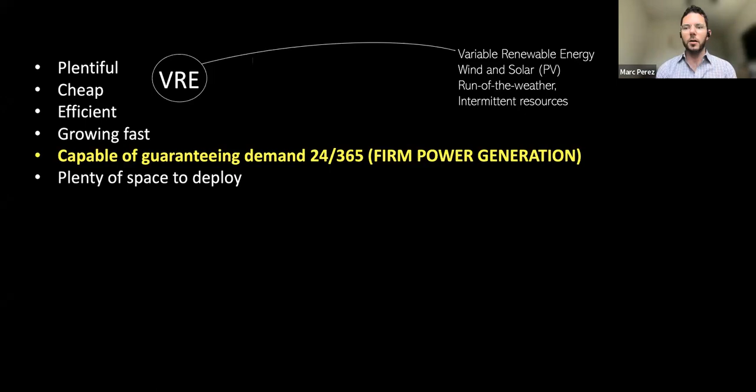We'll have to blanket our land with solar PV and the like, and I'll be describing some of the economics also along the way. So first, the plentiful nature of the renewables.

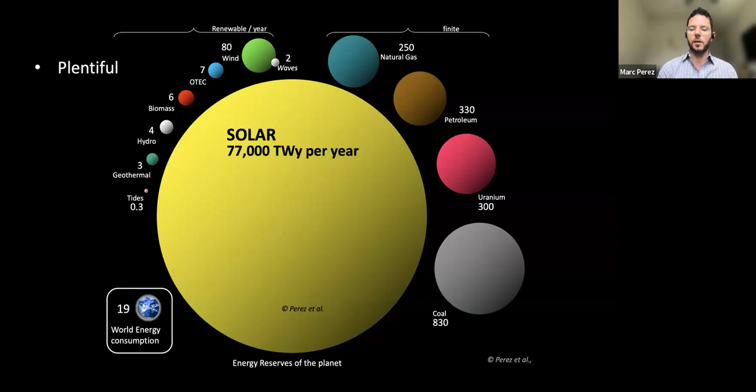Pictured here, an image published by some colleagues and I a number of years ago, showing the various resources available on planet Earth. Over on the left and middle are the renewable resources available per year across the Earth's continents. Over on the right are the finite resources, the reasonably assured recoverable reserves still in the ground as fossil resources and uranium, all relative to world primary energy consumption, including current electrical demand, roughly a third of global primary energy consumption, and the rest mostly thermal energy use.

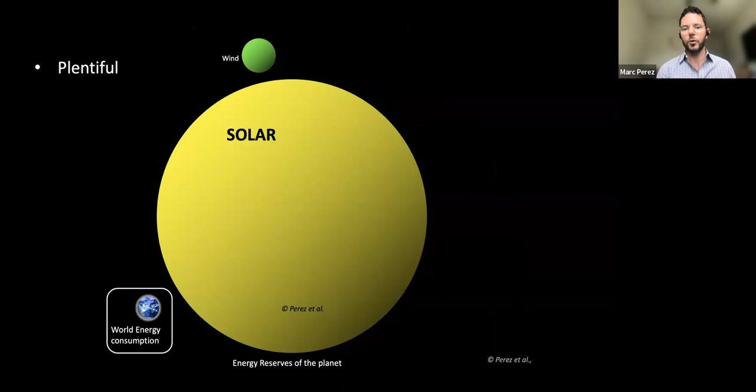Let's focus on the two largest renewable resources here, solar and wind. The diameter of each circle is proportional to the amount of energy available annually, so clearly there's enough solar and wind available. How do we harvest these? For solar, we'll be speaking specifically about photovoltaic electricity production, and for wind, wind turbines, both onshore and offshore.

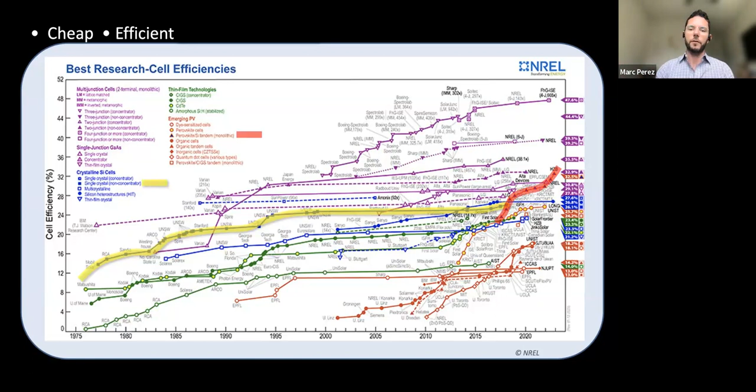This is a chart from the National Renewable Energy Laboratory near Boulder in Golden, Colorado, showing the efficiency of various archetypes of photovoltaic technology from the 1970s to present day. All these lines are on the upswing as technology advances. This is conventional single crystal, silicon-based solar photovoltaic, the mainstay of the industry today. And pictured here are new tandem junction perovskite crystal structure, emerging PV technology which can greatly increase efficiency. This is a rather recent development that will push the envelope even further. So it's growing quickly.

If we project the same growth rate in the future, we'll have enough PV to produce the entire planet's primary energy demand by 2041, which is pretty exciting. And this is only using 0.15% of the planet's surface, a very small amount of land cover. There's plenty of space to deploy. For reference, human infrastructure—impermeable surfaces like parking lots, roadways, buildings and the like—has taken up roughly an equivalent amount of planetary surface area today, so there's really not much more we need to cover than what's already been taken up by human things.

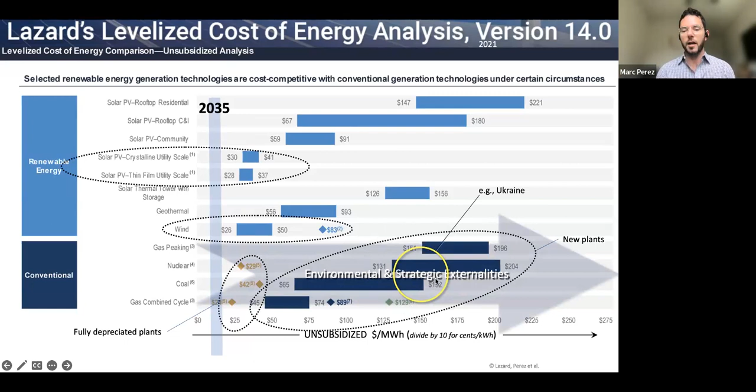One other thing to highlight is that these conventional generation sources come with significant environmental and strategic externalities. An example is the Ukraine conflict and the threatening of the Zaporizhzhia nuclear power plant. Environmental externalities abound too, like air pollution and global warming.

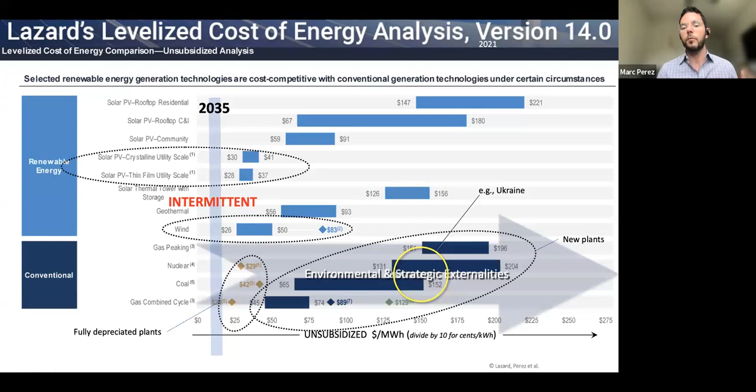There are far fewer externalities associated with renewables, but they are intermittent. That's where firm power generation comes in. How do we transform these intermittent, variable renewable resources into more dispatchable technologies that can be relied upon? So, firm power - what is it, and how do we achieve it?

Today I'll be speaking primarily about least cost firm variable renewable energy power generation. As an example, I'll show a week and a half of electrical demand in New York State. This is just a heuristic example, but a similar story is true for any region, as I'll describe later on.

Currently in New York State, the base load is largely composed of hydroelectric and a little bit of nuclear today. The rest is composed of dispatchable resources, things like natural gas peakers, which are able to ramp up and down to meet this varying load throughout the course of a given day.

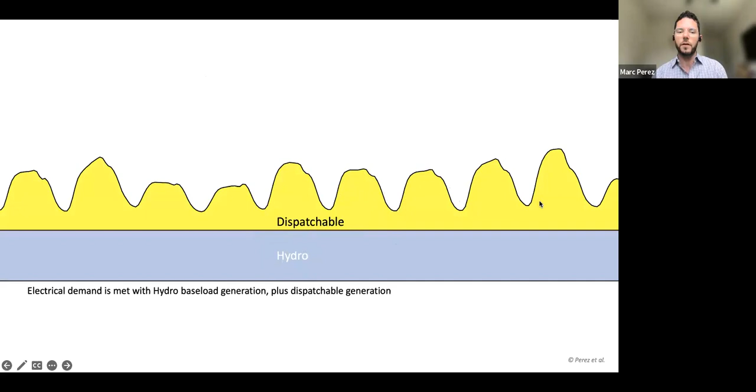This is the extant solar plus wind shape integrated. That's just displacing some of the dispatchable generation now, but it's fine because the residual demand, this remaining yellow portion, can be met by dispatchable generators like gas that can just be turned up and down.

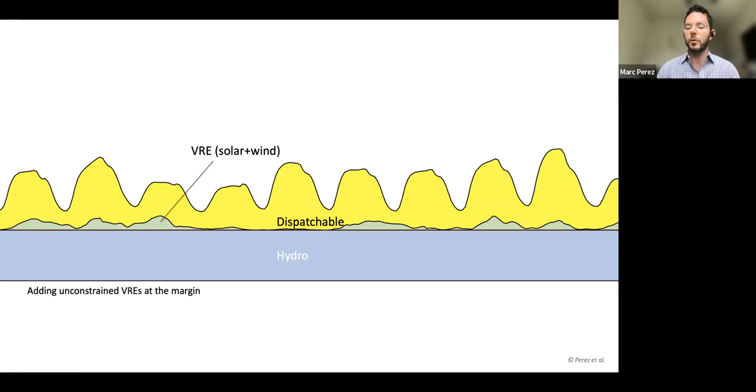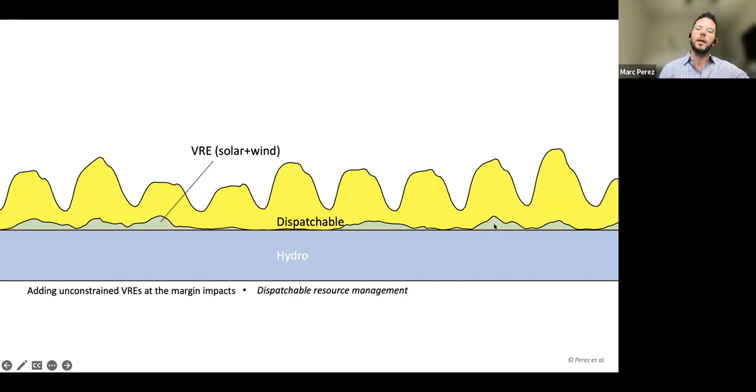That's not the case in the future if we start to really move away from fossil resources. Currently, we need a lot of dispatchable resource management because those resources increasingly need to meet a very variable residual demand after the renewables are taken out and are flooding the energy sector with their variable electricity.

We have electricity markets to do this, and this requires variable renewable energy and net load forecasts that are pretty accurate in order to forecast things appropriately. It becomes a very complex system to balance things out.

More on this later, but the main point I'd like to leave you with is that we need to keep in mind that energy markets, when they were designed, were predicated on energy - on dollar per kilowatt hour - being the fluid moving, the market mechanism essentially.

The reason dollar per kilowatt hour underlies energy markets is because it makes sense from the conventional dispatchable resource perspective - they're all fuel-based, so you're talking about amount of coal and amount of gas. These are kilowatt hour quantities. If we move to renewables, there's no fuel associated with it - it's just pure capital cost, the initial cost you have to pay. The fuel, quote unquote, is free. That's a very different paradigm that energy markets are not really designed to account for.

As a result, it's going to be very expensive. As we increase the penetration, the requirements for dispatchable resource management in electricity markets become heavier, and we need more accuracy on the forecasts. You wind up in a situation where you have way too much variable renewable and need very accurate forecasts. The system becomes very complex because energy markets are not designed to accept a whole bunch of zero marginal cost renewables. So it's going to be a problem in the future.

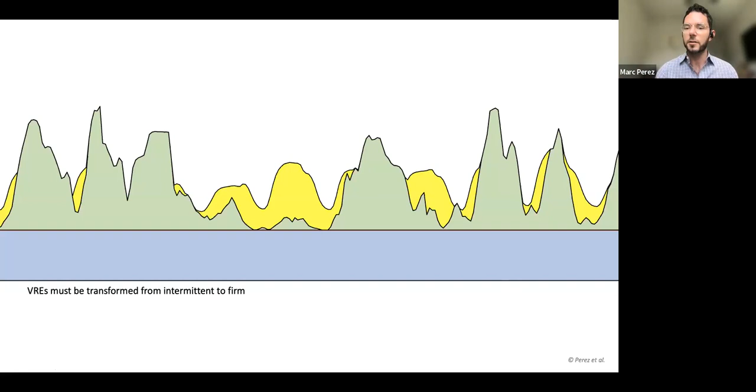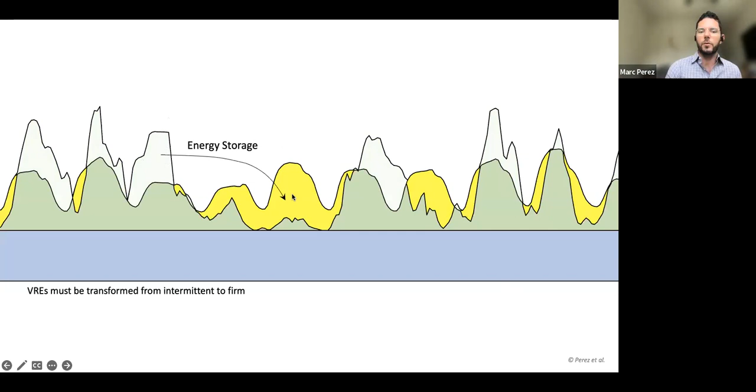So I argue, and many co-authors argue now, that variable renewable energy must be transformed from this intermittent, run-of-the-weather sort of signal into a firm, even dispatchable sort of resource. One way to do this is energy storage - in times of excess, we charge up the energy storage, and in times of deficit, we discharge it so that we can meet demand. This is the essential idea behind firm power variable renewable energy.

You need some degree of energy storage in order to do this balancing, but it can be very expensive, and I'll show that here. Without any balancing at all, renewable energy is cheap, the cheapest in world history as shown on the Lazard slide, especially solar, cheaper than 5 cents per kilowatt hour. But if we add in enough storage to balance things, it increases the cost by orders of magnitude, up to almost 30 cents per kilowatt hour. So extremely expensive.

But when we optimally blend things together, things get cheaper. You may have seen this curve before: the levelized cost of electricity on the y-axis to firmly meet demand, with on the x-axis the degree of overbuilding and proactive curtailment. This is overbuilding the variable renewables to have more supply when the resource is low. When you have long periods of low sunlight or low wind, if you overbuild, you suddenly have more solar and wind power during those periods, and you need to rely less upon real storage.

One other interesting thing this does, in addition to decreasing the need for storage, is it decreases price, and it also reduces the duration of the storage. With no overbuilding at all, we need long duration storage, sized to meet the worst case period of low resource. That could even be seasonal imbalance, so the storage needs to charge up all summer and discharge all winter. That's very expensive because the storage is not being used very often, and storage is expensive and wasteful.

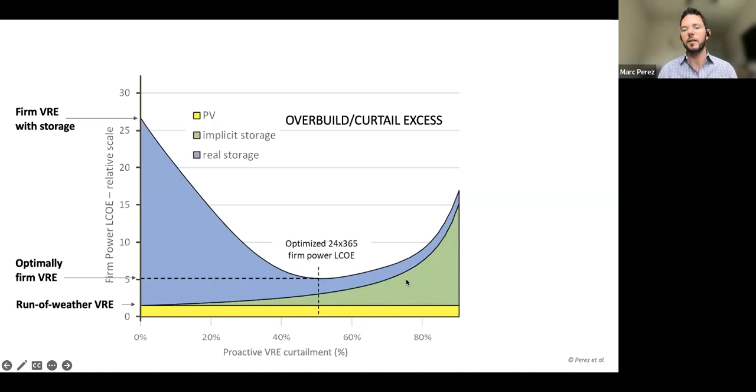As we move further on this axis, we reduce the storage needs and the cost significantly. That's the blue portion of this stacked area plot. The contribution to the levelized cost of electricity from solar increases exponentially because we're overbuilding and curtailing. This green portion, the margin of capacity to overbuild, we're calling implicit storage because it essentially plays the same role as real storage. It's a balancing effect.

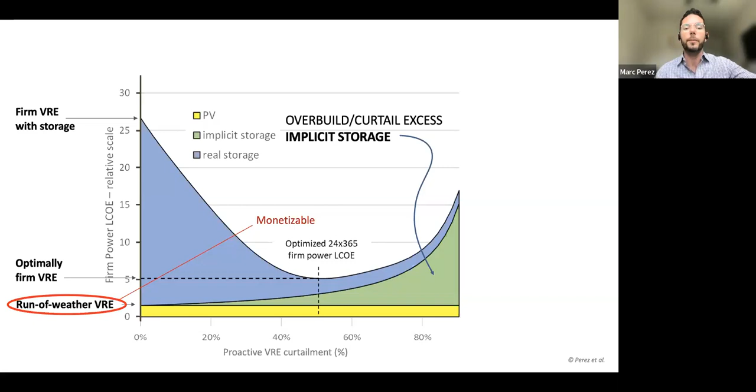So this run-of-the-weather variable renewable energy is monetizable today under extant market rules. You have per kilowatt hour pricing in the markets, and most PV systems and wind systems are signed up to long-term power purchase agreements, another dollar per kilowatt hour sort of mechanism. This optimally firm variable renewable energy is not currently monetizable, or not directly, because there's no incentive for an independent power producer, a solar power producer, to curtail currently. There's no incentive to do so because you're remunerated on a per energy basis.

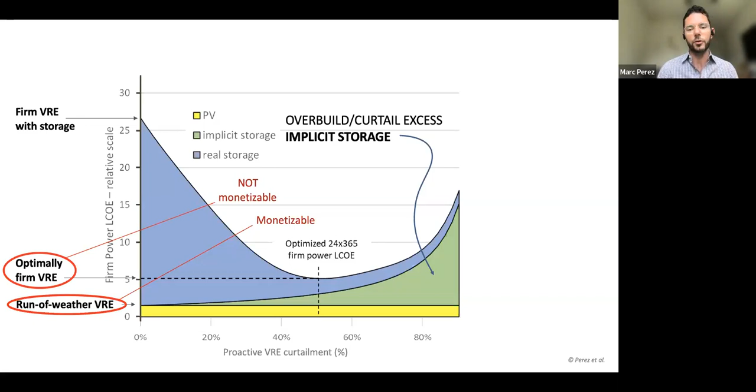So this is just to highlight that we are trending in this portion of the axis. We're not doing a lot of proactive curtailment, we're just moving up the line here, and it's going to become more and more expensive. So the future cost of 100% variable renewable power, as it stands today, without any regulatory changes, is going to be exceedingly expensive. And that's what we'd like to avoid.

So to highlight where the sweet spot sits, because as you can imagine, it really depends on the balance between the solar resource, the wind resource, and the demand, and that differs based on location, geography, topography and other things, we're going to highlight exactly where this sits, and see if this relationship of overbuilding reducing costs significantly holds true with two case studies.

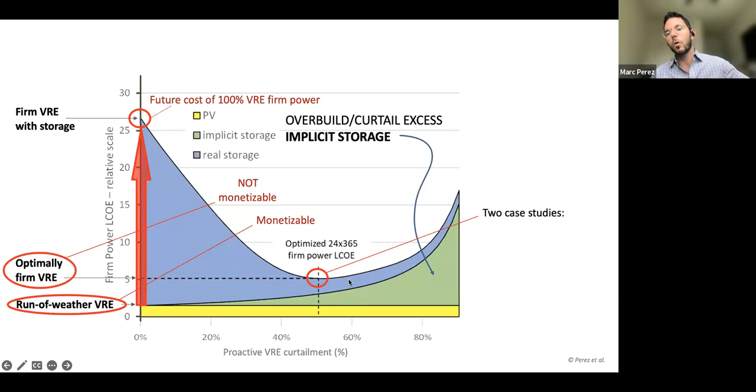The first case study is in the MISO region and the second is in Switzerland. Let's talk about the MISO region first. This was work funded by the Department of Energy and chaired by the Minnesota Department of Commerce under a project called Minnesota Solar Pathways. This is the MISO region pictured at left. The MISO region is the Midcontinent Independent System Operator, the big transmission system operator for the middle third of the United States. This region stretches from the Canadian border up here in the Great Lakes to the Gulf of Mexico. Pictured at left is the solar resource, so a lot more sun in the south than in the north and in the Great Lakes.

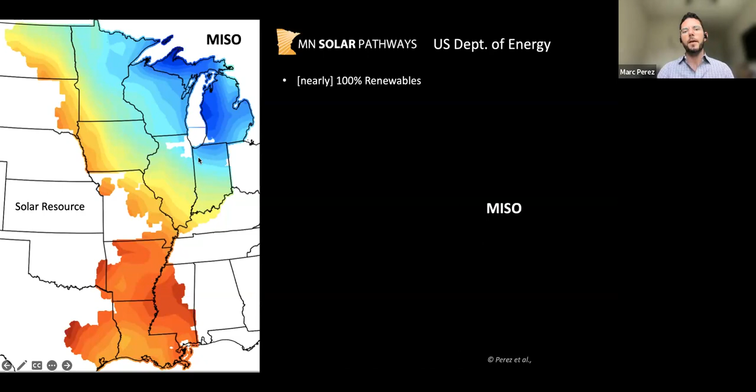What we studied here was nearly 100% renewables with solar PV and wind. Here's the wind resource correspondingly. It's spatially anti-correlated to the solar resource, so you can see it kind of flips: much more wind in the north than in the south, and vice versa for solar.

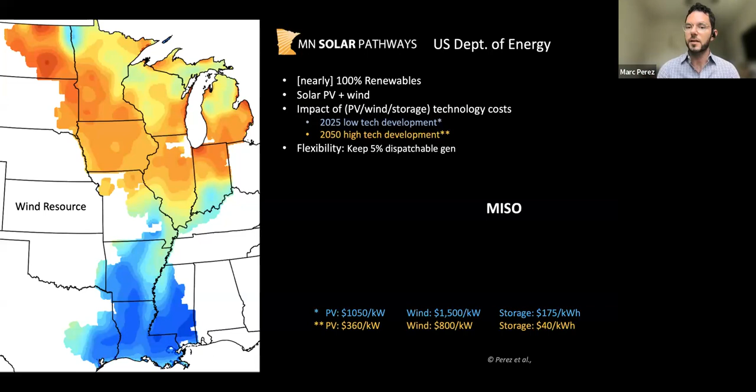We looked at the impact of PV, wind, and storage technology costs, considering 2025 as a low degree of technological development and 2050 as a high degree of technological development, with differential costs pictured at the bottom of the slide. We also looked at a little bit of flexibility, keeping 5% of dispatchable generation in play, and this significantly reduces costs. We wanted to look at this precise impact on cost, so let's dive into some results.

Consider one of the sub load balancing areas in the MISO region pictured here. There are 10 of them, constituting the Michigan oven mitt over here, zone 7. Consider 2025, a low degree of technological development, just PV with no overbuilding.

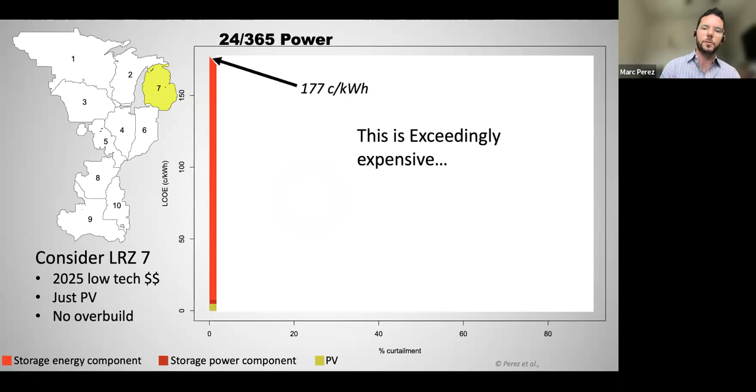It's very expensive to do this with just solar and storage because you need a tremendous amount of storage to account for the strong seasonality of the resource and how that doesn't necessarily match demand. Here we're at almost $2 per kilowatt hour, so very expensive. If we overbuild an appropriate amount, we bring our cost down to 27 cents per kilowatt hour. So it's very economical, and this margin on capacity is implicit storage.

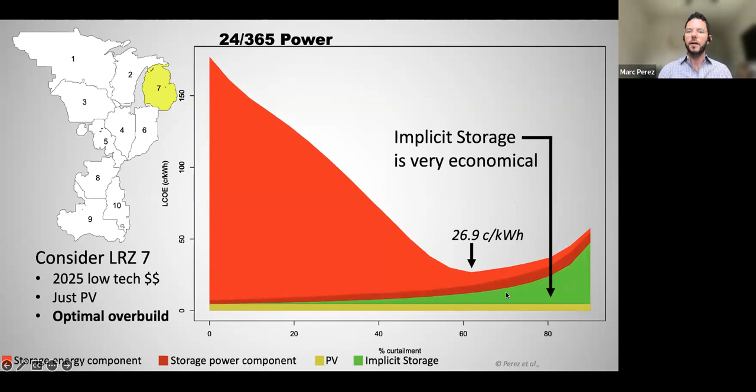If we move to the 2050 high degree of technological development cost with just PV and optimal overbuilding, we reduce our cost by 70% in 2050, down to just sub 8 cents per kilowatt hour. That's a testament to the strong decrease in capital cost expected by NREL in 2050.

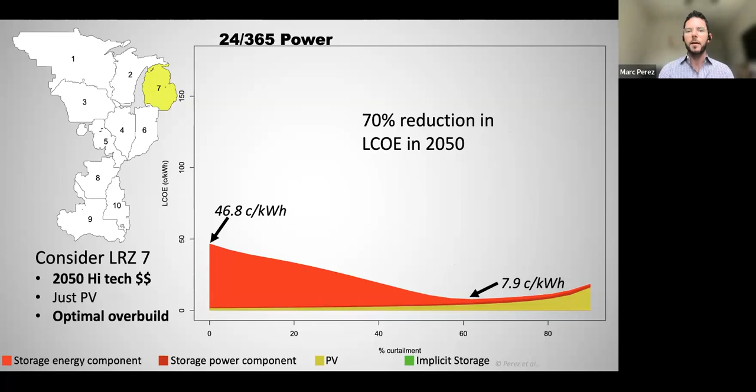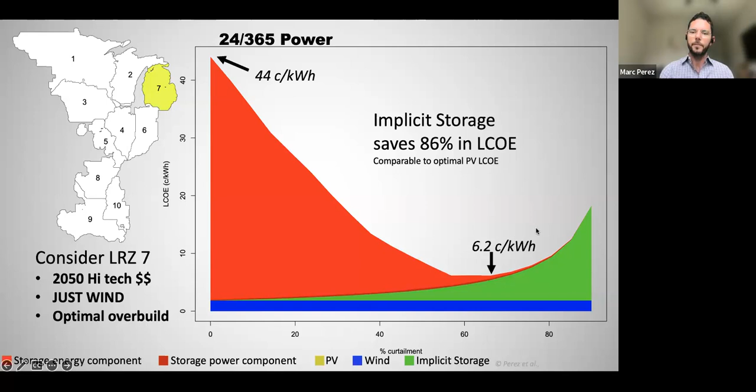But interestingly, because of the seasonal anti-correlation of wind and solar, if we optimally blend the two resources, we can bring our cost down to just sub 5 cents per kilowatt hour. That's because there's much more wind in the winter and much more sun in the summer, so they seasonally oppose each other, and therefore we need less storage and less overbuilding. It's cheaper if we blend both wind and solar together, and here these percentages show where the optimum ended up in terms of the solar-wind blend.

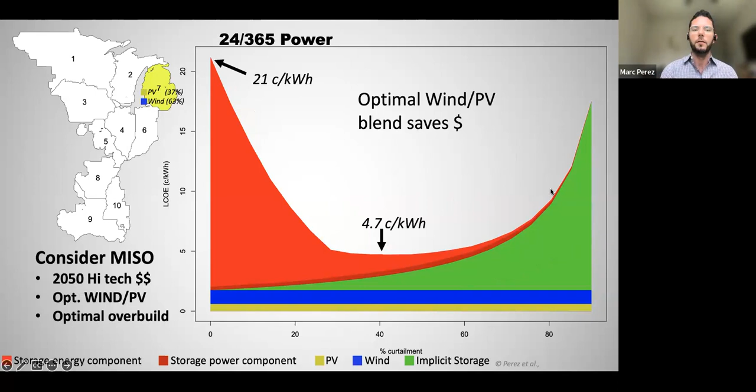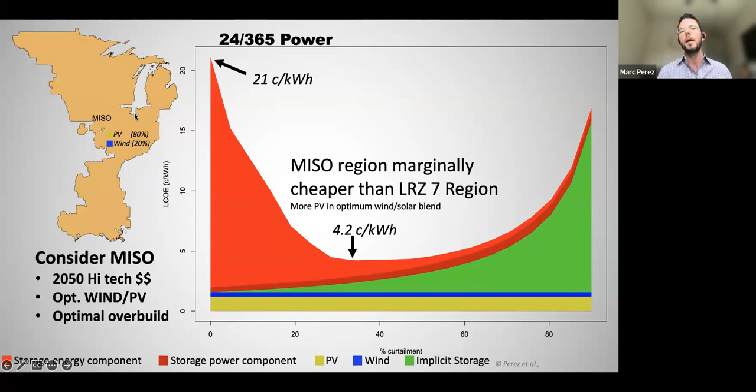If we zoom out to the MISO region as a whole and build up the interconnection across the MISO region, we can bring our costs down even further, to 4.2 cents per kilowatt hour. This is a bit cheaper than local resource zone 7 alone because we're geographically smoothing both resources, reducing some of the variability because it's sunny in one area of MISO when it's not sunny in another, and they balance each other out.

And then we looked at allowing for a little bit of flexibility. So we allowed for 5% of natural gas flexibility in this case. But again, this could be some sort of renewable fuel, electrolysis with synthetic fuels, or something like that.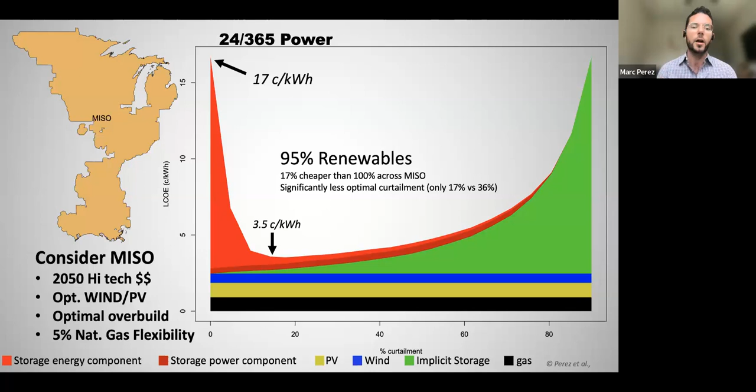So let's focus on the second case study, Switzerland. This study is the Firm PV Power in Switzerland project, FIPPS, funded by the Swiss Federal Office of Energy that we ran maybe two years ago. Here we studied nearly 100% renewables with solar PV and hydro. We looked at the impact of PV and storage technology costs in the future, and we looked at flexibility from dispatchable generation. This is the solar resource in Switzerland, very different scenario from the MISO region.

So throughout the course of a year, this is at the horizontal plane, in kilowatt hours per kilowatt per day. Interestingly, there's a 7-fold difference in yield between a midsummer day and a midwinter day, which is pretty tremendous seasonality. So there's 7 times more energy from the sun in summer than in winter. One reason for that is the latitude of Switzerland. The other reason is that there's a lot of clouds amplifying the seasonality in Switzerland in the winter months specifically.

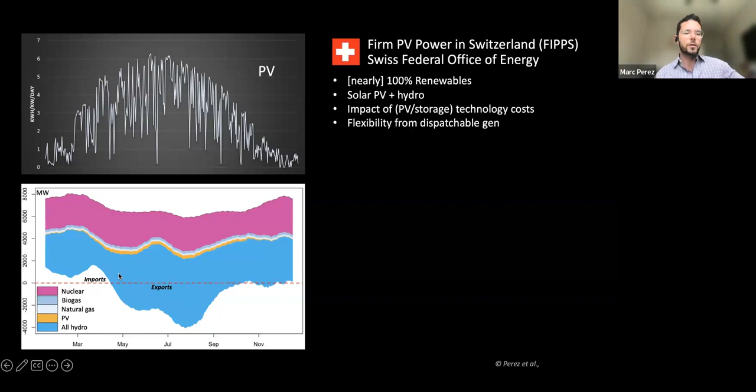This is a stacked area plot of the demand, which is the top of the stack here in Switzerland throughout the course of a year, shown as a 30-day moving average. The colors represent what contributes to meeting this demand currently, in 2022 or 2023. The pink portion is nuclear. The blue portion is the various forms of hydro Switzerland has at their disposal. The white areas above the red line at 0 are the imports, and any colored areas below the dotted line are the exports. So there's a lot of exchange in energy between Switzerland and the surrounding European region.

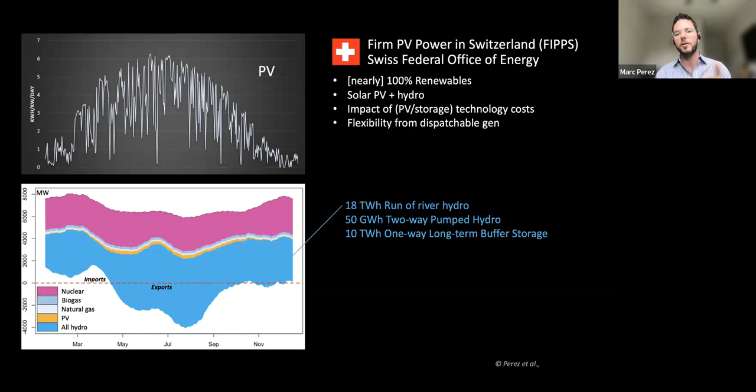They have 18 terawatt hours of run-of-river hydro. They have 50 gigawatt hours of two-way pumped hydro. They have 10 terawatt hours of one-way long-term buffer storage — these are, for reference, lakes at high altitude that fill with snowmelt throughout the spring and summer months, and then can be dispatched as reservoirs with turbines attached to them at other times. Their objective for 2050 is 30% load growth, a 100% phase-out of nuclear power — this is already regulated — and very limited wind power development in the future with limited hydro growth potential. They've already kind of maxed out the amount of hydropower they can do of various types.

So this is PV. We looked at 6 scenarios across Switzerland. Firm power PV is the yellow portion, hydro is blue, gray is other, existing PV is orange — so not much — and pink is nuclear. You can see in every scenario there's a 100% phase-out of nuclear power. This gray zone of 'other' is what differentiates the different scenarios. And I'd like to focus on scenario 4.

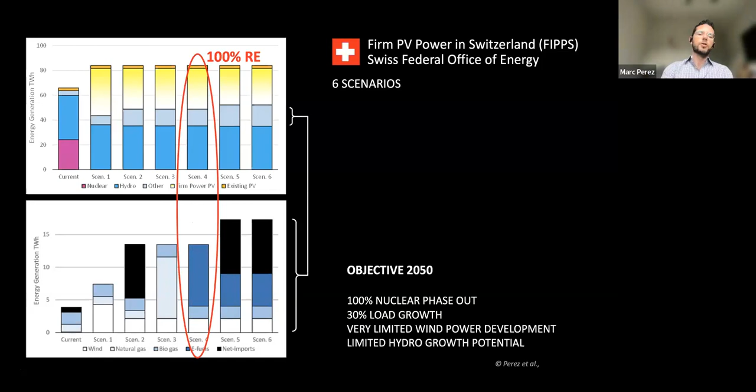You can read more in the report that I'll share the link to later. But scenario 4 really focuses on 100% renewables. There is some dispatchable resource mixed in here, but it's all e-fuels — so it's all electrolysis and the Fischer-Tropsch method to get to synthetic fuels, as I mentioned previously.

So we have the e-fuel price at 20 cents per kilowatt hour, biogas at 11 cents, and wind at 12 cents. We have 2 PV and storage cost assumptions: one for small-scale systems with PV at just sub-1,000 Swiss francs per kilowatt, and storage at 330 Swiss francs per kilowatt hour. Swiss francs and US dollars are roughly equivalent, so you can easily do the conversion. For utility-scale systems, we have cheaper costs — 300 Swiss francs per kilowatt and 45 Swiss francs per kilowatt hour — with 2 interconnection configurations. The first is an interconnected grid with net zero import-export, and the second is an autonomous grid, cutting the cord to the surrounding region around Switzerland.

So that's isolating Switzerland electrically. Here are the results in terms of cents per kilowatt hour. You can see the group of 6 scenarios on the left are with net zero import-export, allowing for power exchange between Switzerland and the rest of Europe. The other 6 scenarios are the same scenarios contextually, but with Switzerland cut off electrically. The two colors represent conservative and optimistic technological costs — red and blue. The red are conservative costs, the blue are less conservative, or optimistic, technological costs, so cheaper.

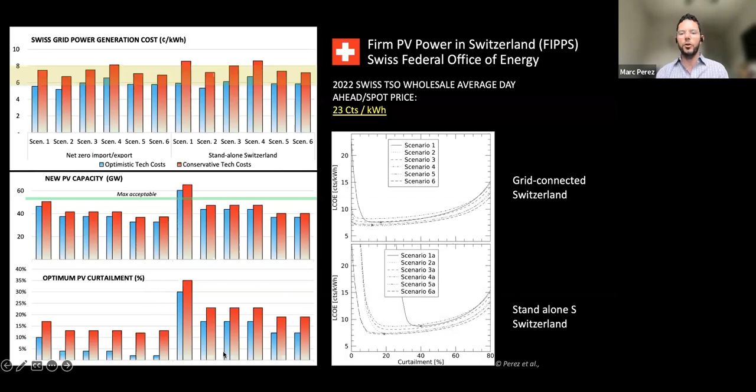Here are what the U-curve optimization curves versus curtailment look like, and levelized cost of electricity for the various scenarios, for a grid-connected Switzerland and for a standalone Switzerland. One thing you'll note is the optimum sweet spots all move to the right for the standalone, as can be witnessed here, and that's because you don't have the rest of Europe acting as this infinite battery.

Key takeaways I'd like to highlight are that renewables are large enough, cheap enough, and won't require too much land. Firming variable renewables is achievable at minimal cost. We showed this through 2 case studies in MISO and in Switzerland, with very different resources and demand. These indicate that 100% renewable grids are technically possible and economically reasonable. Implicit storage is the cornerstone to delivering firm power 24/7, 365.

Long duration storage and large scale transmission are not indispensable. Implicit storage is not currently monetizable despite being economical, and this is due to the archaic electricity market structure that I briefly touched upon earlier. Furthermore, time is of the essence, so the longer we wait to change market structure, the more expensive it becomes.

I'd like to briefly touch upon this latter piece, this time is of the essence piece. So this is the importance of timing. Market rules currently, as I mentioned earlier, fail to facilitate progressive integration. What we need are market rules facilitating progressive and effective integration of VREs, optimal wind and storage, and PV balance to deliver firm power.

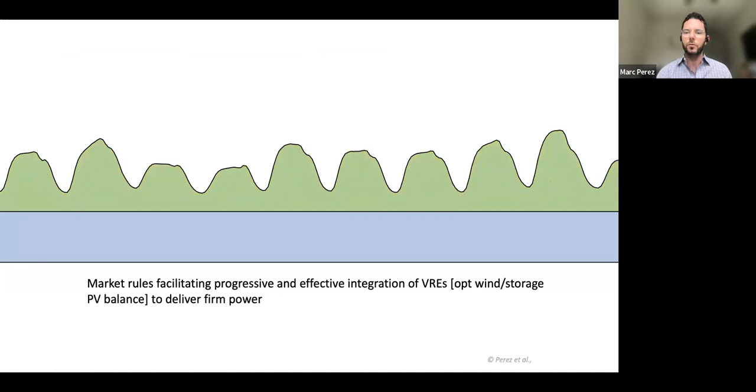So that we can transform this variable green signal, which is the aggregate renewable or marginal renewable energy production, into something that's firm, something that approximates the actual load shape or the actual residual load shape after the hydro or nuclear or some base loads are taken out. That way, as we increase the penetration of renewables, it retains the same shape and the cost doesn't really transform tremendously.

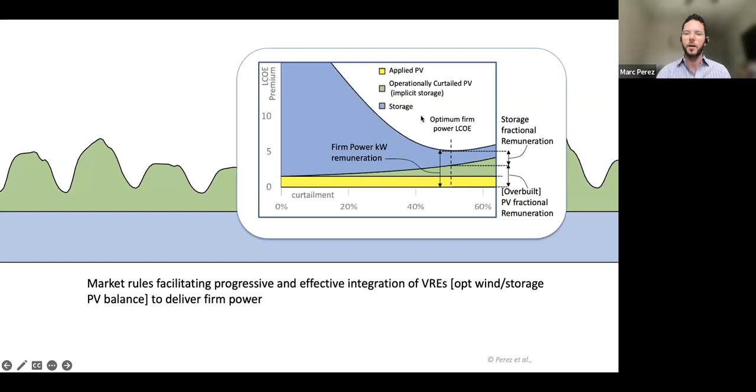So how do we do this? We need a firm power kilowatt remuneration. That's the idea, a dollar per kilowatt amount that's remunerating the firm power kilowatt instead of being differentiated based on storage and solar and implicit storage. Then we can divide it out between the different components contributing to the firm power. That's the idea, remunerating the ensemble, remunerating installed capacity, and remunerating outside of current energy markets, which again are energy based and not designed to facilitate zero marginal cost energy flooding the market in droves.

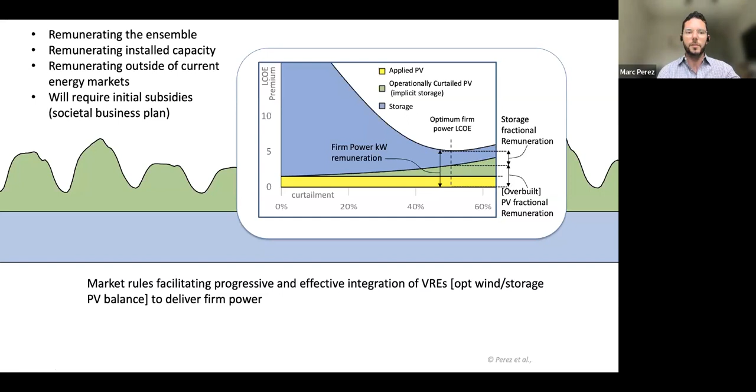So this will require initial subsidies. There could be a societal business plan for this, where it's tax-based or something like that.

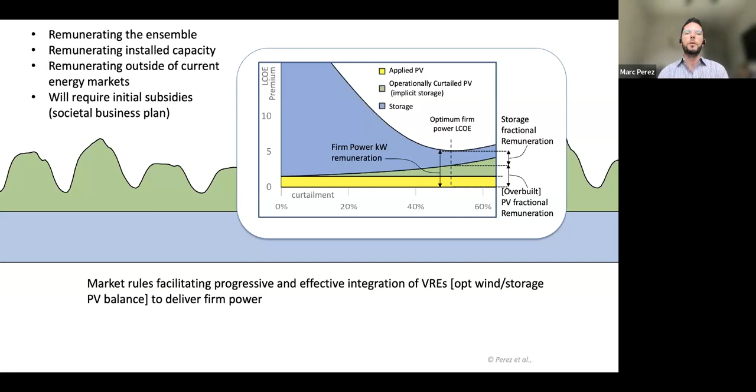We need subsidies because right now renewables are too expensive, or firm power is a little too expensive given current price points for solar, wind, and storage. But in the future, it will certainly be economical.

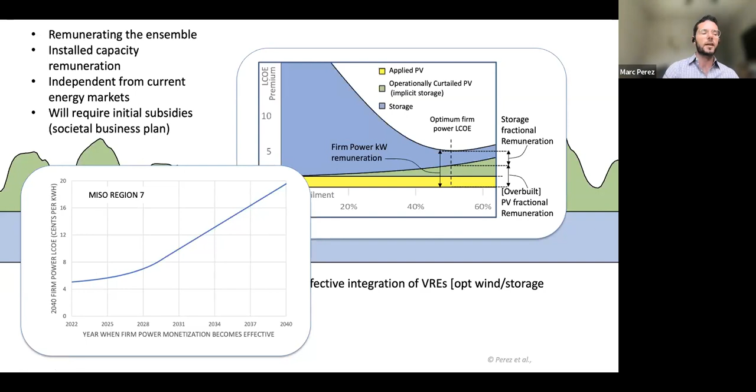This is a word of warning: a graph showing the date on the x-axis and the firm power levelized cost of electricity per kilowatt hour as we move forward in time. The price of meeting residual demand will only go up the longer we wait, because we're having unconstrained renewables flood the market, and then the residual signal becomes much harder to match. So the price goes up over time, unfortunately. It's better if we act sooner, otherwise our price will be much higher than it needs to be in order to meet 100% of our demand with renewables.

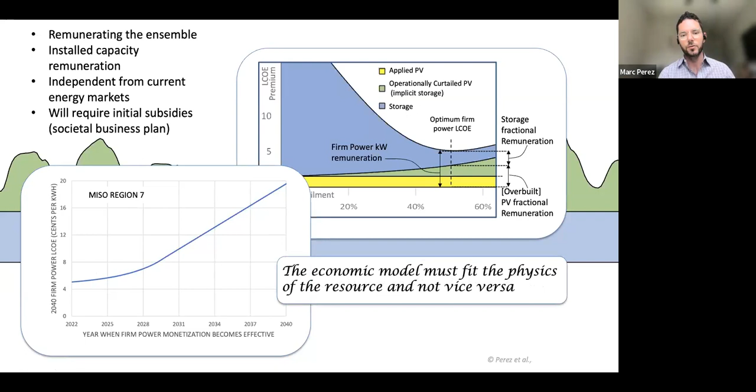In the words of my colleague Jan Remund from Meteotest in Switzerland, the economic model must fit the physics of the resource, not vice versa. That's all I think I have time for right now. There are some slides that I have on land use, but I can open it up for questions now, and then we can touch upon some of the land use constraints a little bit later.

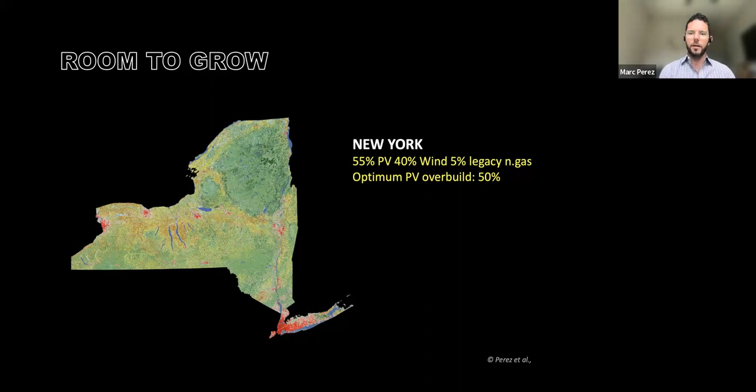As I mentioned, one common misconception surrounding renewables is that we're going to need to blanket the land with solar panels and wind turbines in order to come anywhere close to meeting total demand, but that's just not true. Here's a case study for New York State, a paper we published a number of years ago, where we looked at 55% of future energy being met by solar, 40% by wind, and 5% legacy natural gas, but again, it could be some other dispatchable resource, with an optimum solar overbuild of 50%. We looked at 100% electricity, transportation, and building electrification, and where to deploy it.

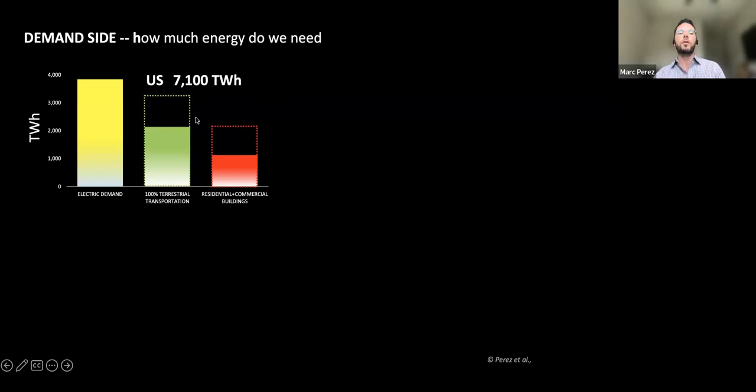On the demand side in the US, here's the breakdown of electrical demand and the extant energy use from terrestrial transportation and buildings. This is what it would look like if we electrified relative to current transportation and building energy usage, because electric motors are much more efficient than combustion engines. So we actually reduce the primary energy required to meet this. This is the total energy we need to generate to meet future electrical energy use in the US, about 7,100 terawatt hours.

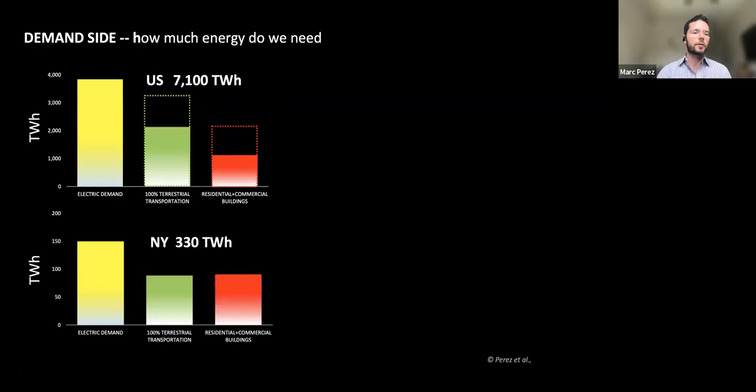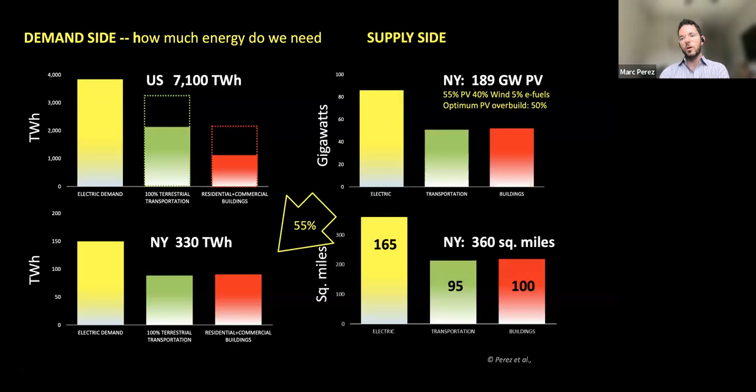In New York, it's about 330 terawatt hours, one of the bigger states in the US. You'll notice residential use is higher than for the US proportionally, because it's a colder winter, so we need more electrical heating. On the supply side, we'll need about 190 gigawatts of PV to meet this 55% of the 330 terawatt hours we've earmarked, which equates to about 360 square miles. This might seem like a large number, but let's put it in context from a land cover perspective.

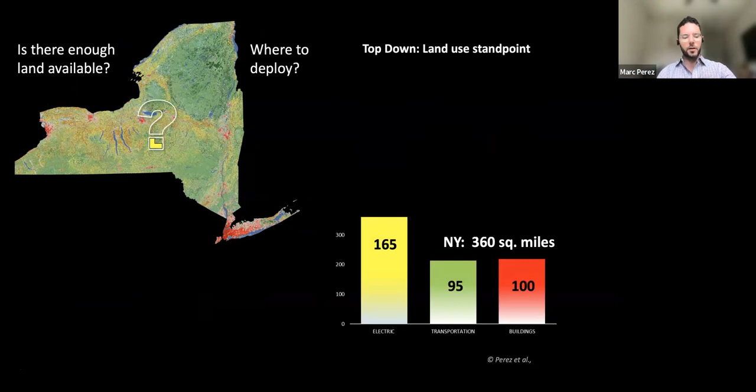So where do we deploy? We took two different approaches: one is a land use standpoint using a top-down approach, and one is a bottom-up end use activity standpoint. Here's a breakdown of extant land cover in New York State. It's mostly forest, with some hay pasture, cultivated crops, wetlands, suburban sprawl, urban, etc. We've earmarked a certain percentage of these different land cover categories for potential PV deployment.

If we say 15% of all urban land cover can be filled with PV, this is a seamless integration because we've already taken up the land with impermeable surface, so we're just adding it onto rooftops, parking lots, and roadways. 5% of open water with floating PV, reducing evaporative loss, and 5% of suburban sprawl, 1% of these other categories. This equates to 650 square miles, which is a very small amount. There could be much more if we recovered some of the forest growth we've had since the 1880s, when New York was mostly agricultural.

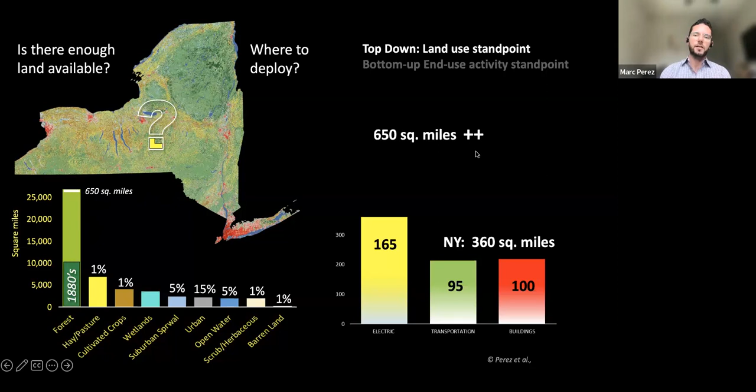We could have a lot more than 650. And then we looked at it from an end use activity standpoint, so deploying PV without functional modification. We looked at industrial, commercial, residential building area, and 50% roof utilization. That's 185 square miles across the state.

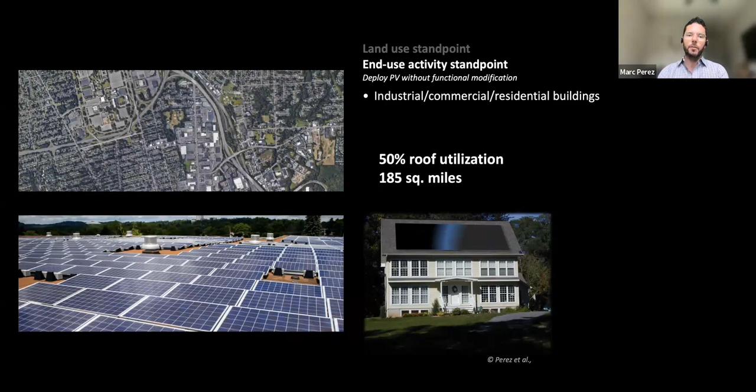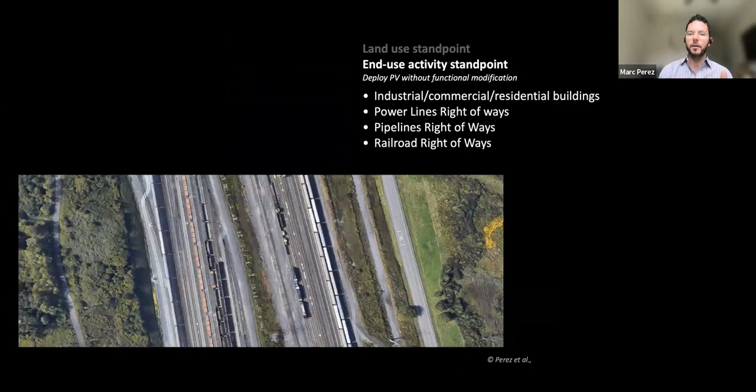We looked at the power line rights of way, that's 161 square miles. We looked at pipeline right of ways, that's 21 square miles. Railroads, that's 21. Expressways, center lanes only, that's 12 square miles. And VIPV, vehicle integrated PV.

Here are some examples. It's not going to look like this in the future, not going to look like actual solar cells. My guess is that every electric vehicle is going to have just solar paint. It's not going to look like anything because the aesthetics of solar PV are changing rapidly.

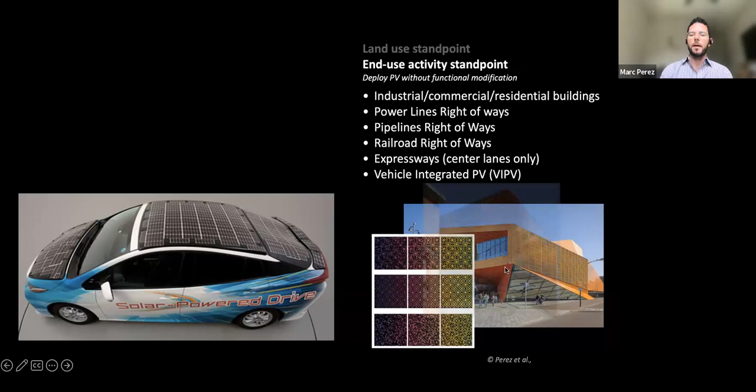Here are some recent examples. Here's another recent pretty example. You could do any sort of paint job that you want with solar these days.

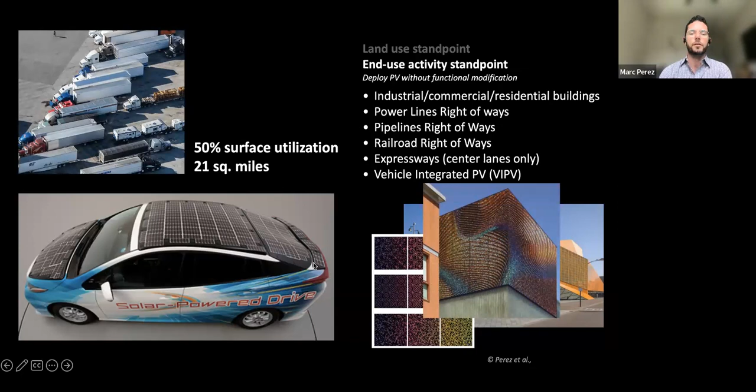And then there's the tops of these containers or trucks, truck containers, which is roughly 21 square miles if we do 50% of all the automobile surface area. Then we have landfills and mines, that's 29 square miles. Parking lots, 24 square miles.

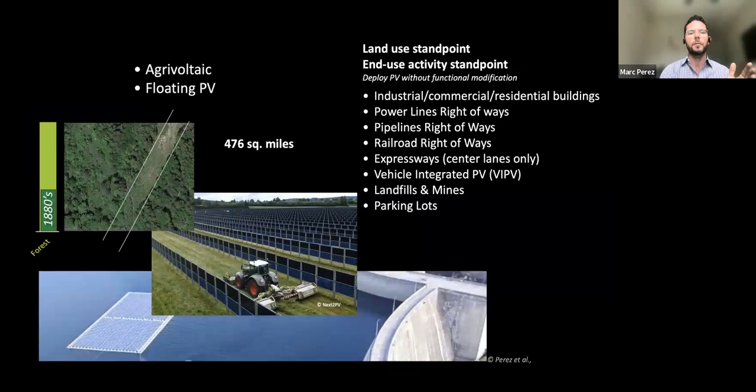Agrivoltaic, 476 square miles. Floating PV, or excuse me, it's 476 square miles with just these end use elements. And if we include agrivoltaic and floating PV, and maybe some forest recapture, it could be a lot more than 476 square miles.

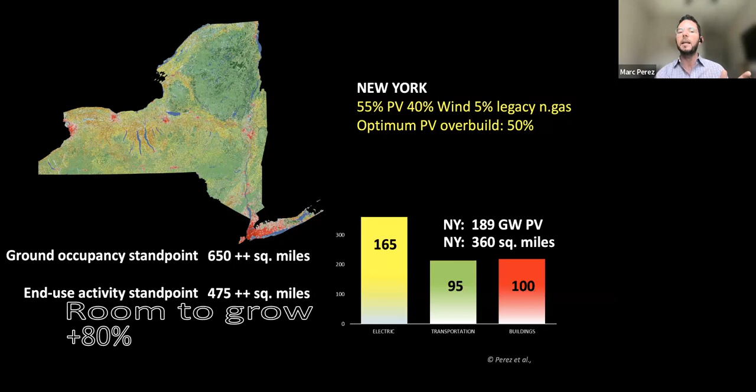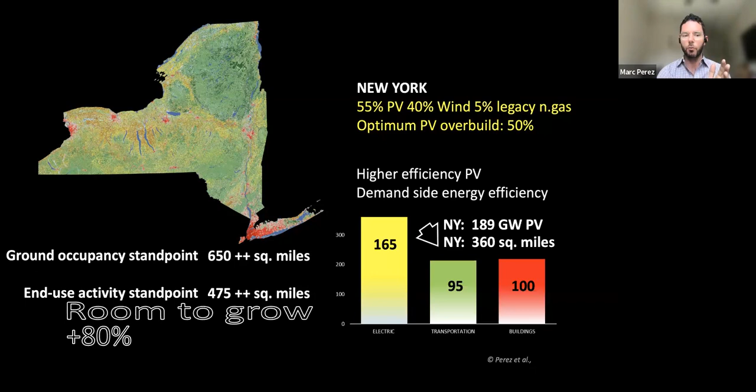So overall, we took two approaches. From a ground occupancy standpoint, we calculated 650 square miles. From end use activity, we calculated 475 square miles. So there's plenty of room to grow in New York State, roughly 80% or more than 80% relative to what we need to hit our target of 55% PV in New York State. With higher efficiency PV and demand side energy efficiency dropping the demand a little bit, this could be even more room to grow than we've identified here.

So, okay, that's what I had to share on the land cover. Happy to take some questions now if you want.